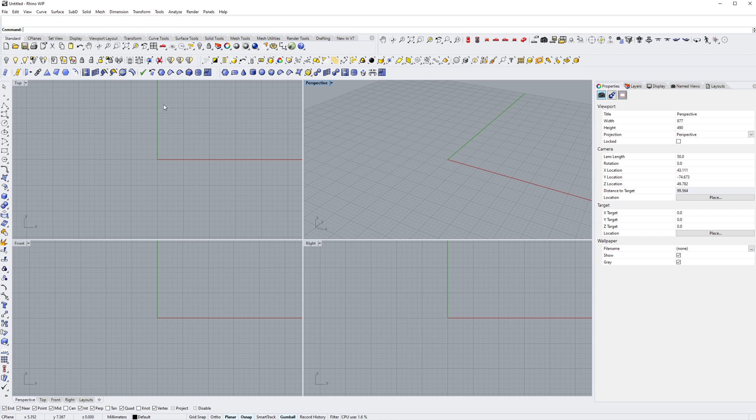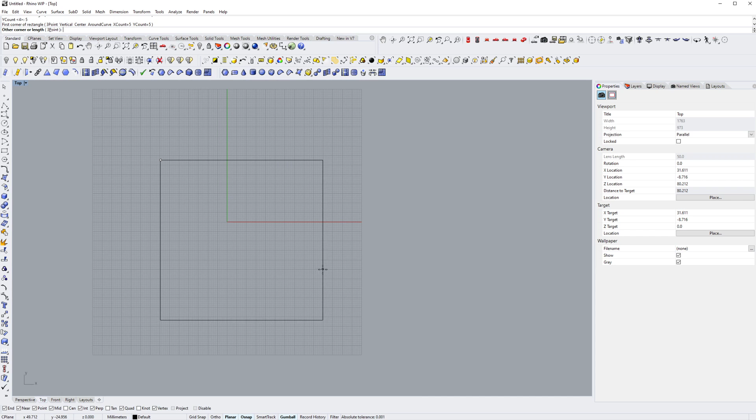So first we're gonna go to the top, and we're gonna go to SubD, and here we're gonna choose Create SubD Plane, and we're gonna keep, let's say, 5 X count and 5 Y count. Once we create this square, you will see that now we get a SubD plane, which has its own surfaces, its own vertices.

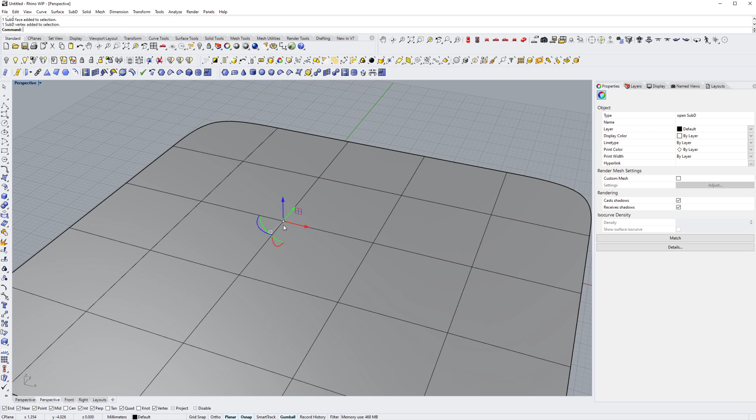The cool thing here is that you can select every single vertex. If you hold Control and Shift and click on the point, you can select a single point, and you can move this just like you see here.

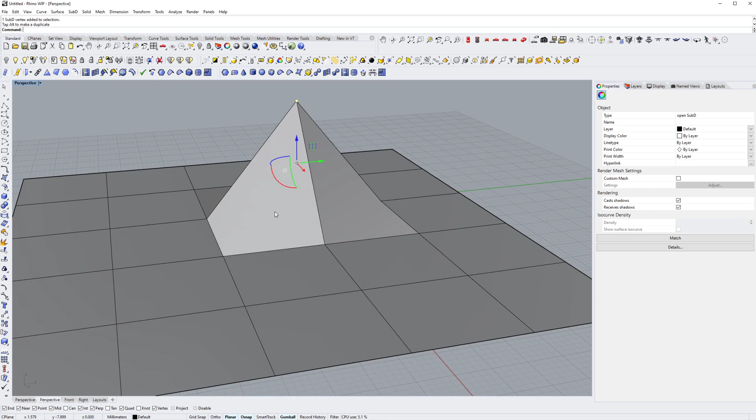And the cool thing about it is that when you press Tab, you have the so-called crunchy mode, which is just terminology McNeel uses, but we can call it low poly mode or whatever works for you. If you press Tab one more time, you get the smooth transition. If you remember, that's exactly how our geometry is supposed to look like.

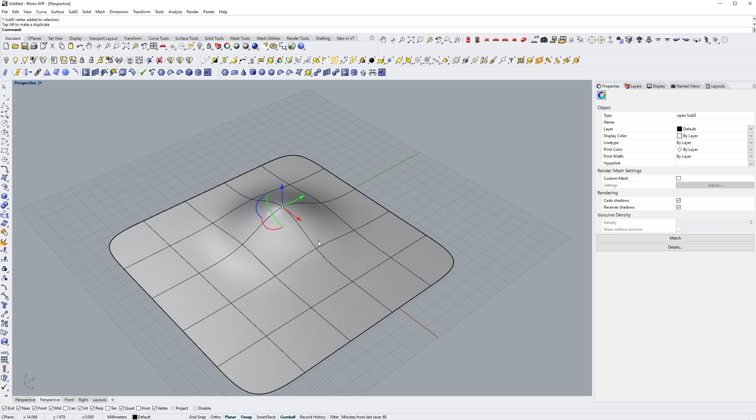Now I'm just gonna give you a couple more pointers on how you can manipulate SubD geometry. The cool thing is that you can select the whole edge. If you hold Control Shift and double click on one edge, you will be able to select one edge, and then you can bring the whole thing up just like this.

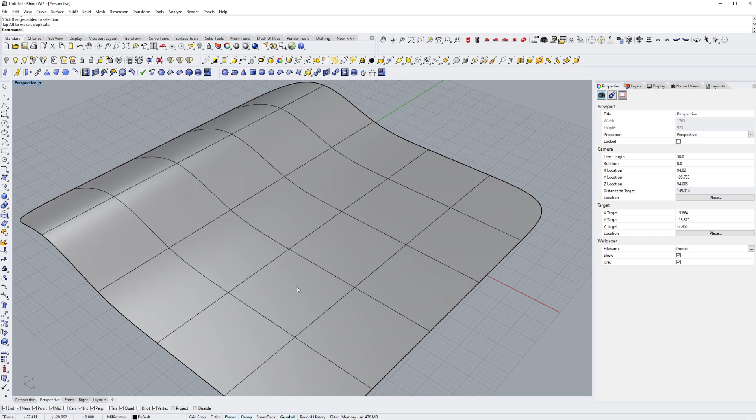On the other side, you can also do this with SubD surfaces. If you double click like this, for example from here to here and double click inside, it will select the whole row of SubD surfaces. That's very handy to know, because sometimes you want a specific selection.

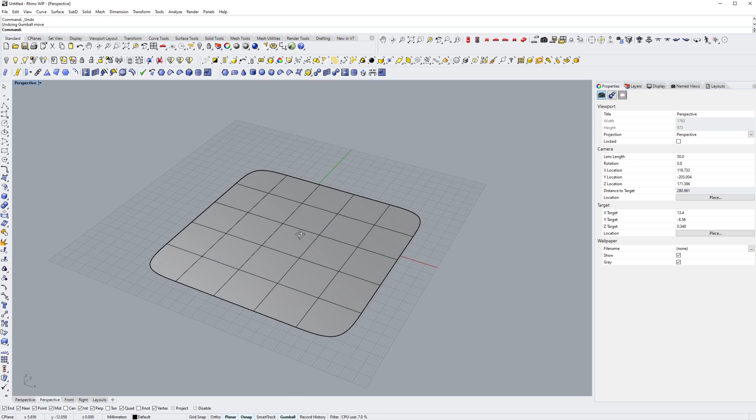In our case, we simply need to extrude this SubD plane here. So we can either do the extrusion that looks something like this, and then you can see how this looks in low poly mode.

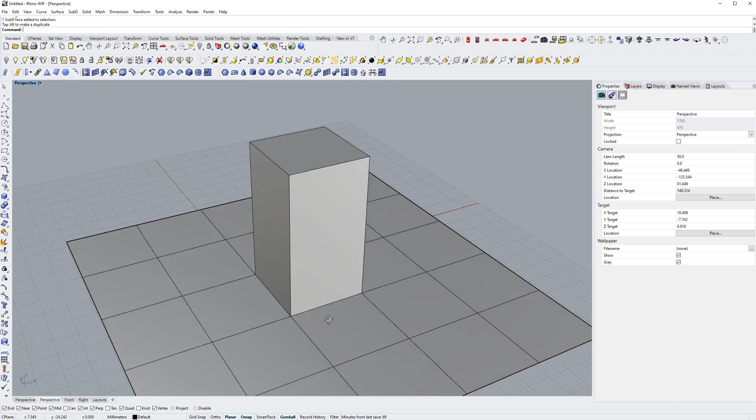If you want to have a better transition, what you can do is select these 4 vertices, and you can come here to the scaling tool, hold Shift and create something like this, and then maybe bring it up a little bit. This will give you an even nicer transition for the whole element.

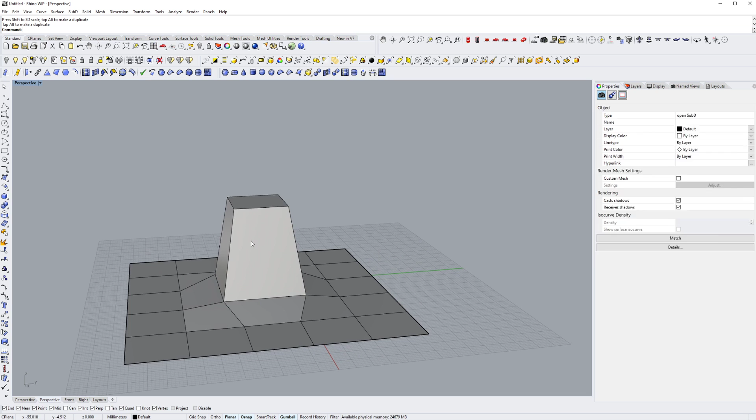And of course, if you want, you can do the same thing in this smooth mode, so you don't need to go all the time into low poly mode. You can also manipulate this on your own, scale it and do whatever, but we're gonna keep it symmetrical for now.

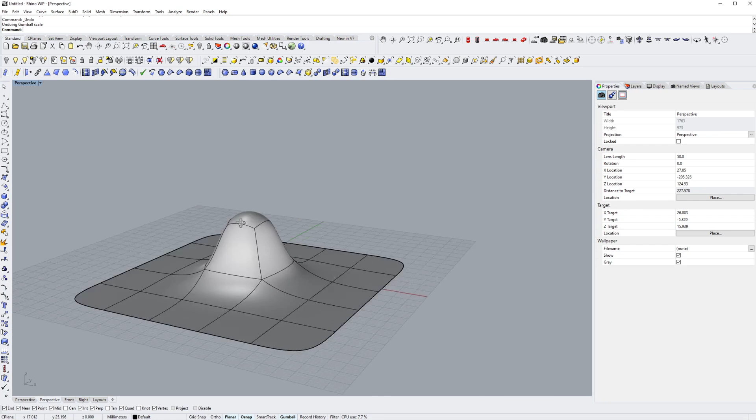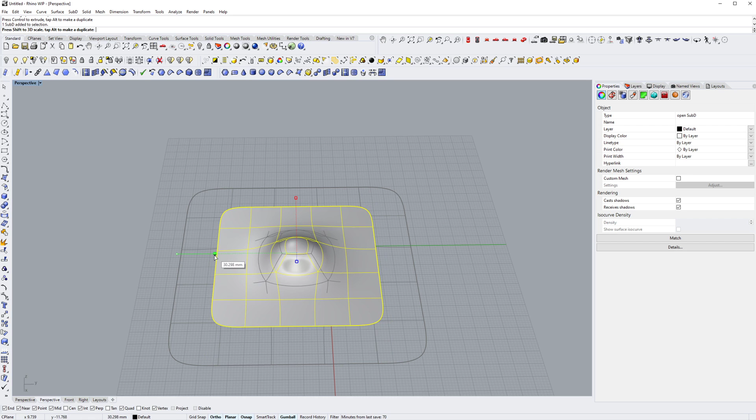So I'm gonna create something that seems more like, for example, let's say this guy here. Maybe I would scale it in a little bit, and maybe I can scale it also from here.

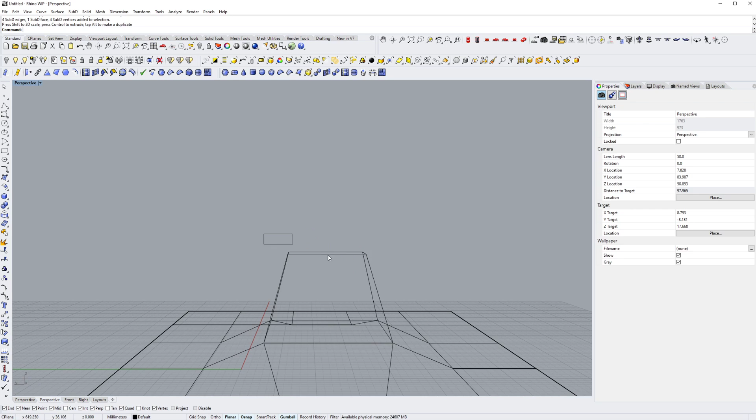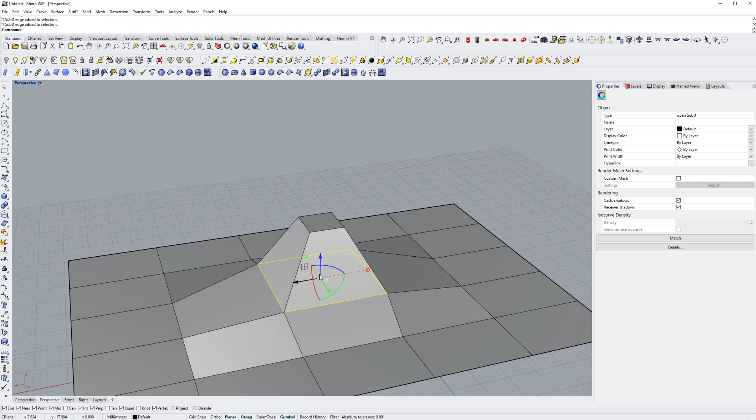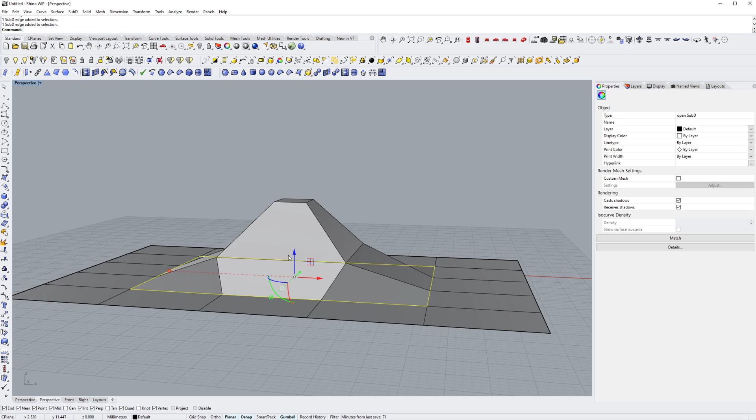We can scale these in as well, and maybe from this side, so we get a more sharp corner. Something like this. If you want this transition to go all around, you can select, for example, these edges here and scale them even more, bring them more up. This really seems like a good transition. One more time, we're going to do the same thing here, maybe with these guys as well. So once we have them, we can just bring them up a little bit, and now we'll have that transition just like in the example. So that's one thing. And now, what if we want to convert this shape?

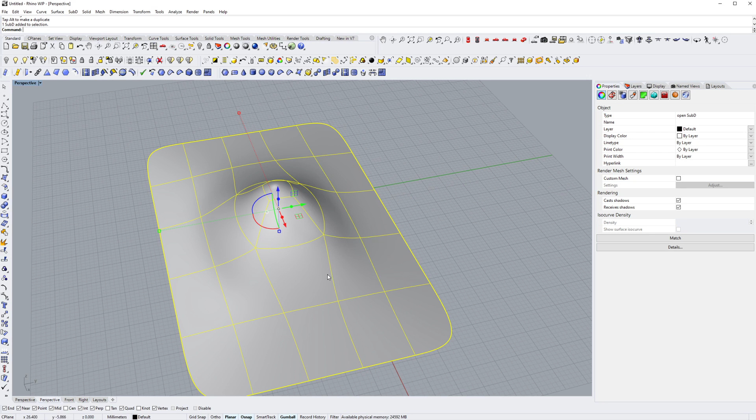What do we do? First thing you can do is convert the SubD object to a NURBS surface. To do that, you just need to type, let's first copy it over, then type ToNURBS, enter. Let's go again, delete object input, yes. And now you can see that we have a poly surface with multiple surfaces.

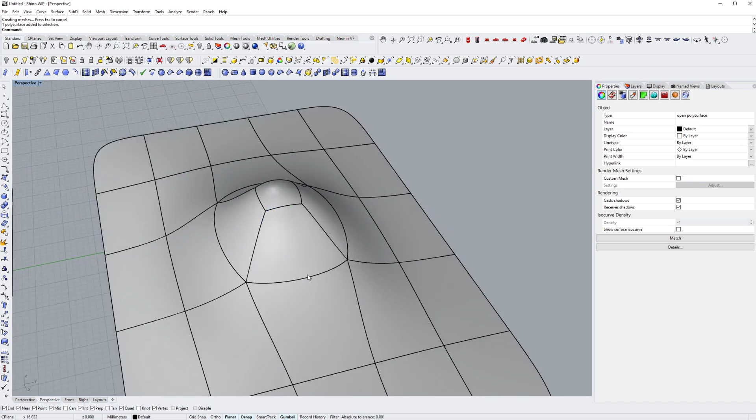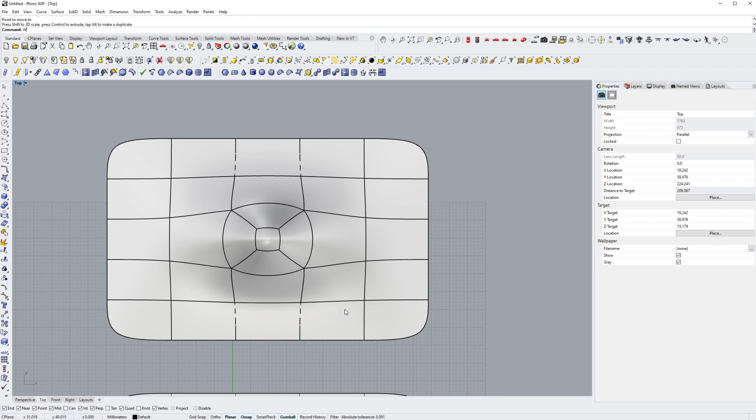However, if we want to have a clean surface in Grasshopper, we need to rebuild this. First I'm going to go to the top and create one rectangle here. Let's go from here first. Scale 1D, and now I'm going to scale it in like this, bring it in the middle. Okay, and I'm simply going to do trim, and we're going to get this.

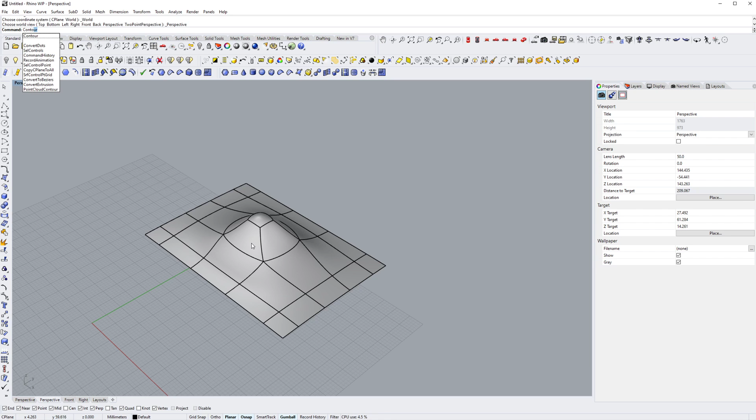And now we don't need this anymore. Now what we need to do is rebuild this surface. We can do this in multiple ways. Maybe the easiest one would be to create the contours. So let's do contour. This will be the object.

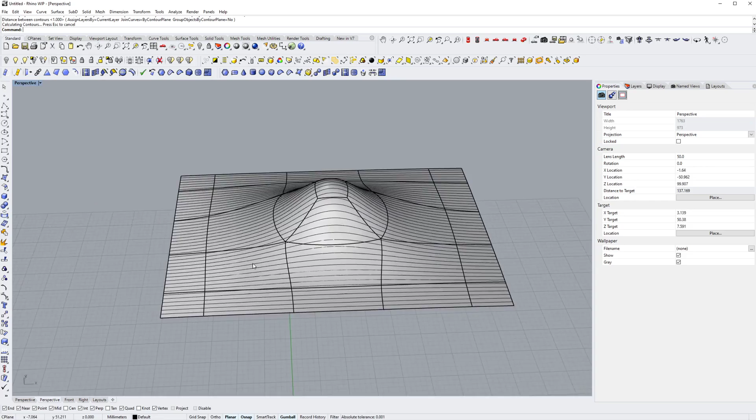Base point would be here, this would be the other one. Distance between contours, let's keep it 1. And I have these contours on this side. And you want to do the same thing on the other side, so I'm going to do the same command again. I'm going to keep this point and this point, and there you go.

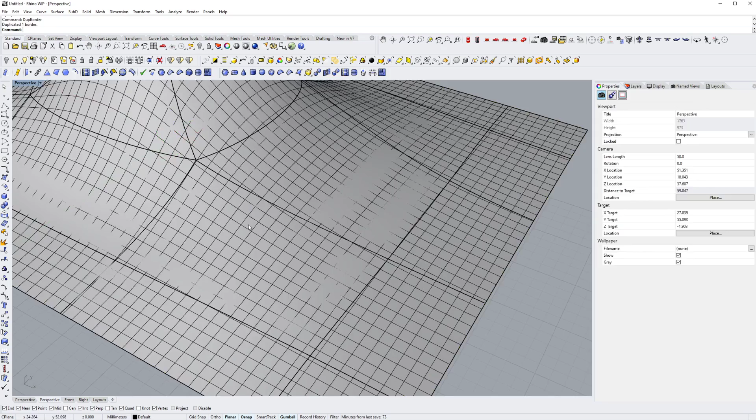Last thing that we want to do, you want to say duplicate border, and you can delete the SubD, and this is what you're left with. And now you just need to do a simple patch. You can keep the default, and now you would get the clean surface that we're going to continue to work on in Grasshopper. There it is.

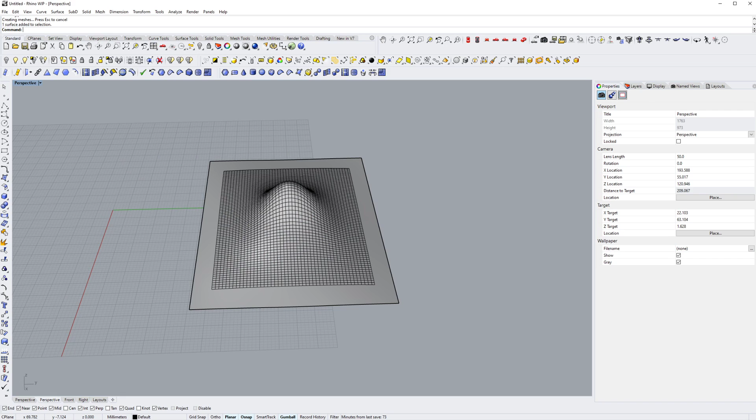Okay, so now, just a second. Okay, so now we're going to transition. Lazar's going to hop in and he's going to continue from here. Yeah.

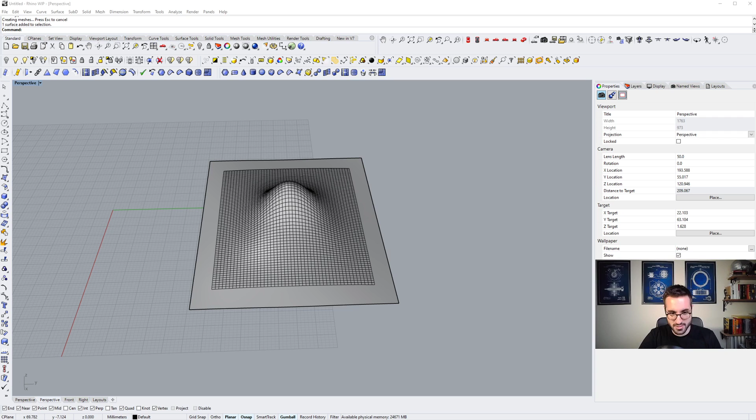All right, as we created a surface, now we can import it in Grasshopper. And I'm going to run Grasshopper.

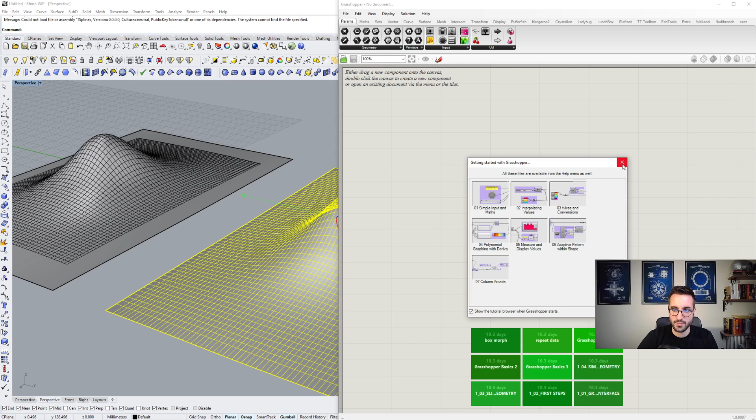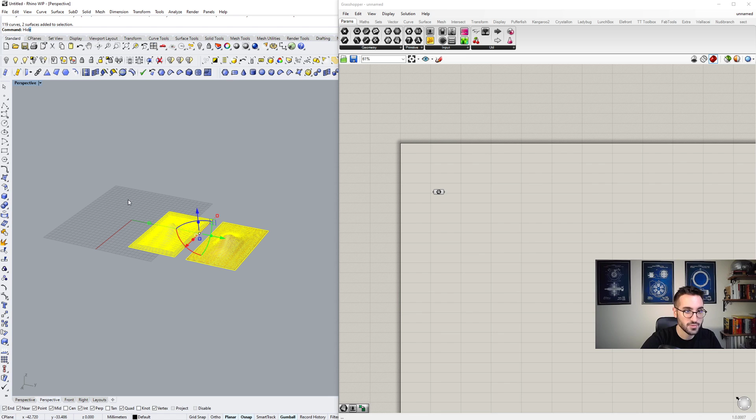All right, first we're going to use a surface container in order to reference the surface from Rhino into Grasshopper. I'm going to hide all of this. And as we can see in the Rhino viewport, we reference this surface inside Grasshopper, and now we are going to divide it in order to get the points.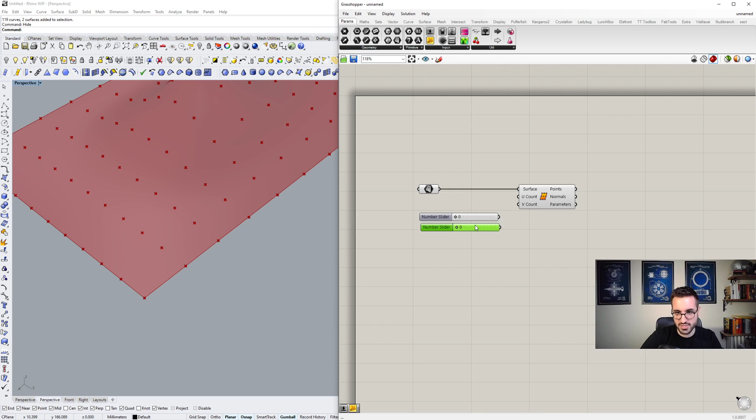All right, let's make a stronger density from 0 to 100, and I'm going to copy this slider because we need to divide the surface along the U and along the V direction. And we can see here the division points.

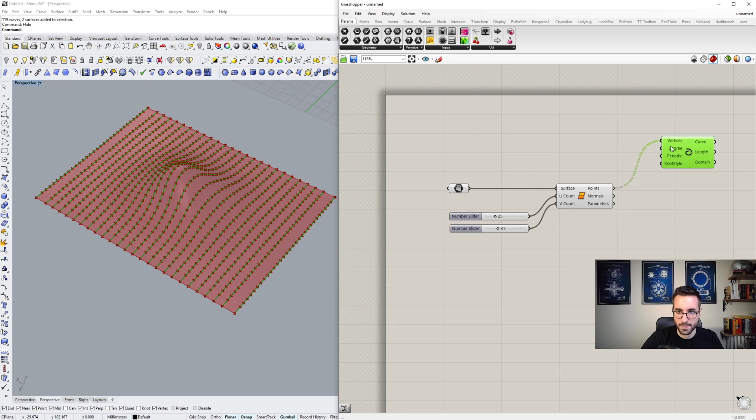Right now the next step is to connect these points and create lines along both directions, along U and along V. I'm going to import interpolate curve and connect points with the vertices. Let me turn this off, and this guy as well.

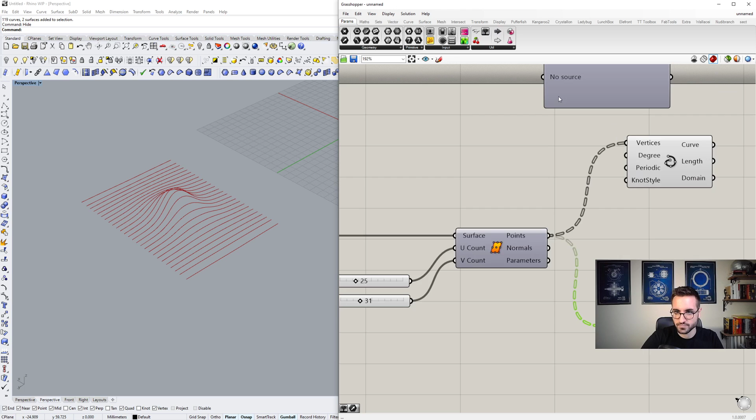And we created the curves along one direction, but we also need curves in another direction. All we need to do is flip the matrix. Let me show you here what we did. Using the param viewer, we can check the data tree inside the component. You can see there are 26 branches, and each branch contains 32 items. But once we flip the matrix, we have 32 branches and 26 items inside each branch.

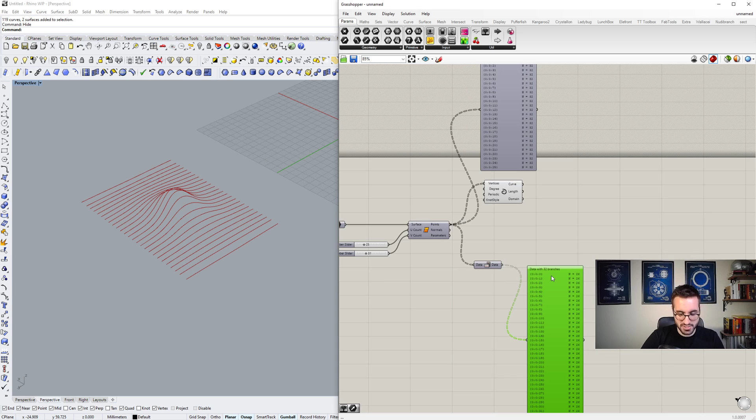I'm going to copy this guy and create the curves along another direction. All right, and the next thing...

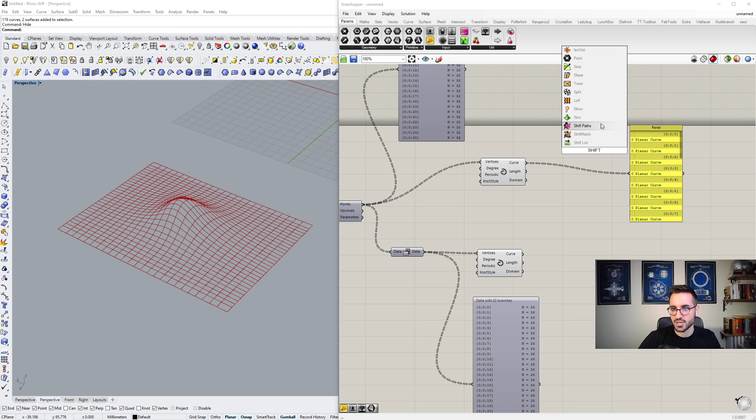I want to remove the first and the last items inside each list. We want to remove first and last, but first let me shift the paths in order to have, because right now the tree looks like 26 branches with one item inside each branch, but we want to have one branch with 26 items. We can do this by offset, and right now we have branch 0, semicolon 0, with 26 items. And we are going to do the same thing here.

Once we have all items inside one list, we can remove the first and last item using Cull Index. For the indices, since we want to remove first and last, we are going to use a Merge component.

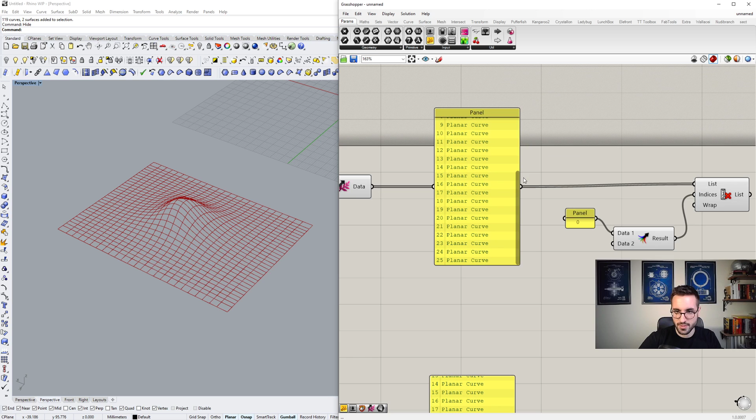Into input data 1, we are going to import 0. And for data 2, we are going to import 25 here, and here 31. You can use the sliders from here.

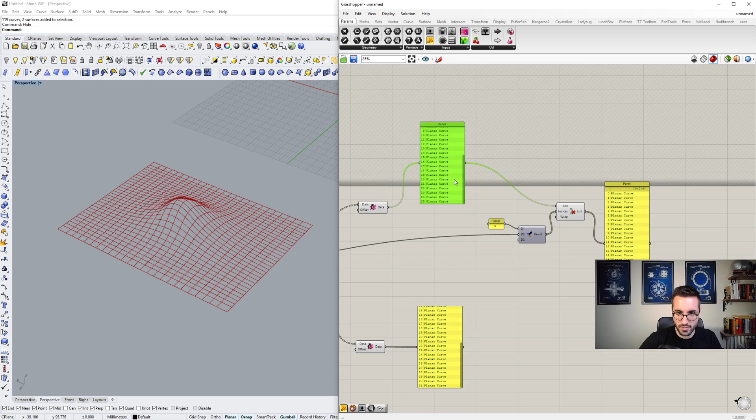Let me check here. Because I connect the text from the panel, the geometry is not visible in the Rhino viewport since text cannot be visible right now. So we need to connect the data from this component.

Right now we see that the highlighted components are only the middle ones, so it's not highlighted the first and the last one. And we are going to do the same thing for the curves in another direction.

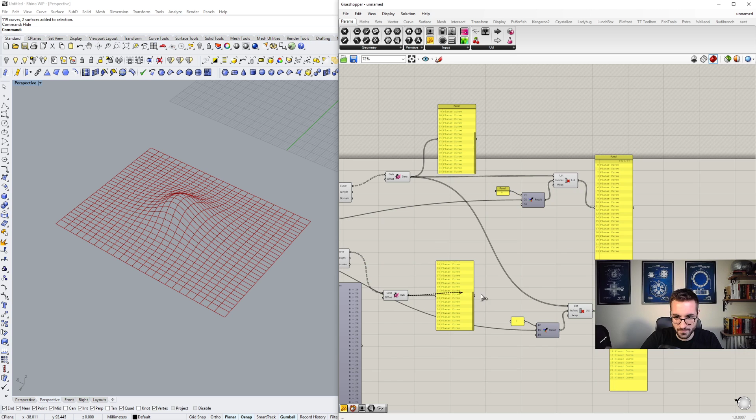But here for data 2, we will input 31. We should move the video on the left side - just give me a second, because the video is... okay, let's go now. Okay, now it's better.

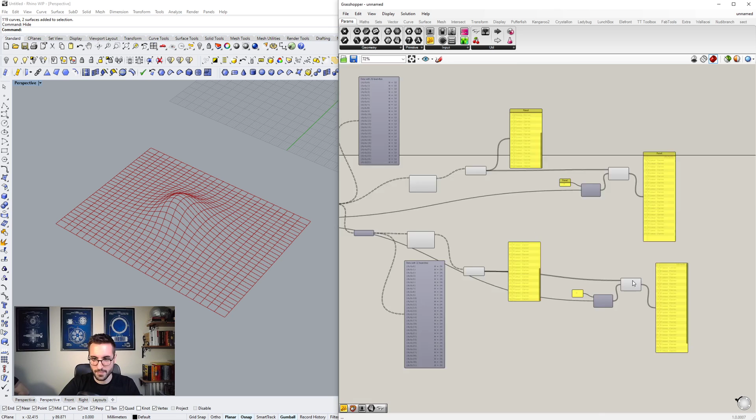And using Cull Index, we discard index 0 and index 31. I'm going to turn off this.

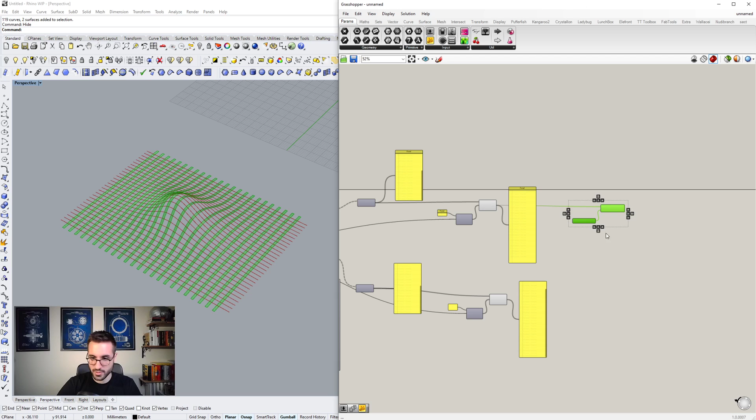And now we will extrude each of these. One we're going to extrude along the X direction, and another we will extrude along the Y direction using Vector Y.

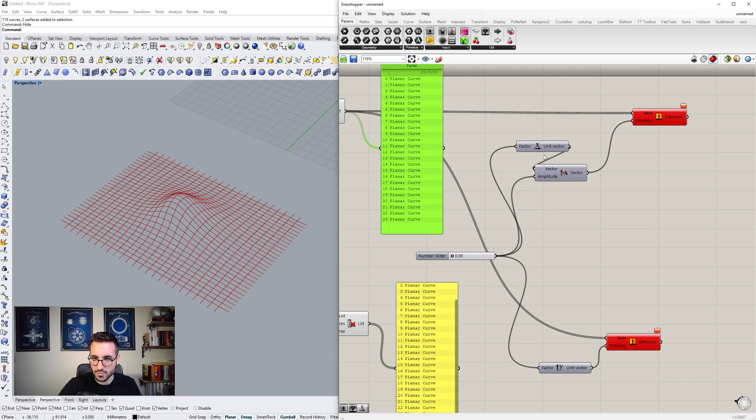And we will use the same amplitude for both of these lists - the amplitude and vector. Right.

You don't need this. All right. And the extrusion will be for another direction along Y. And we can see in the Rhino viewport that these lines became surfaces.

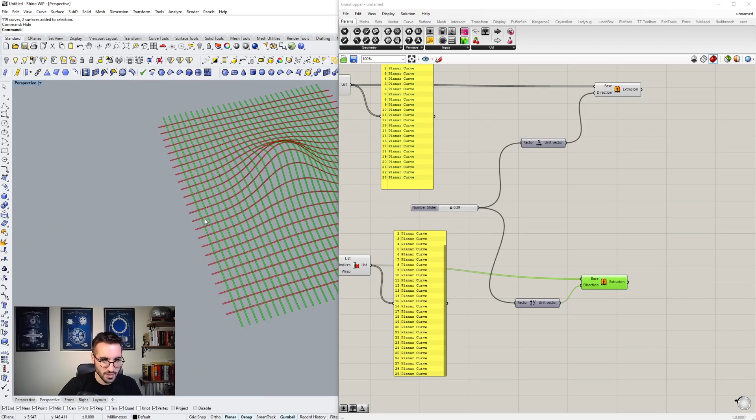And now we're going to extrude them along the Z direction. Again, we'll use Extrude and the same factor for the extrusion. All right.

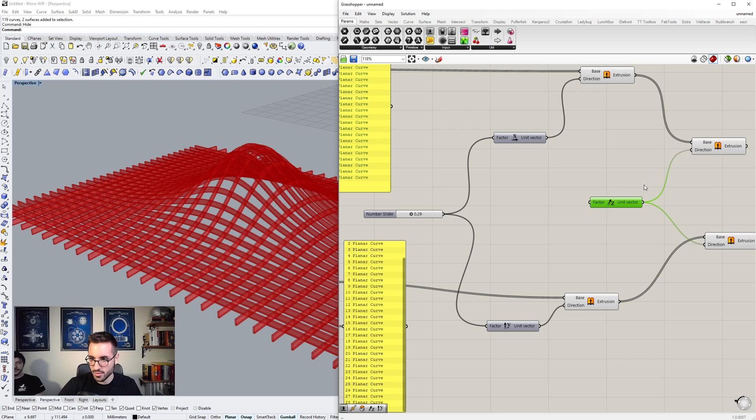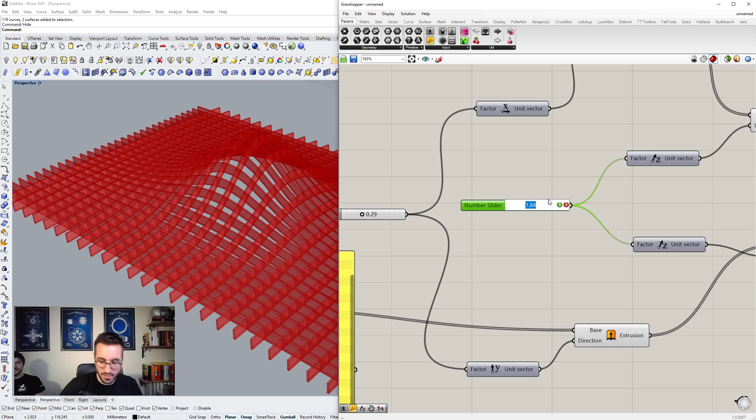Let me check how it's going to look. All right, awesome. Maybe this should be a little bit smaller - let's say 1.5. Cool, and it's quite similar.

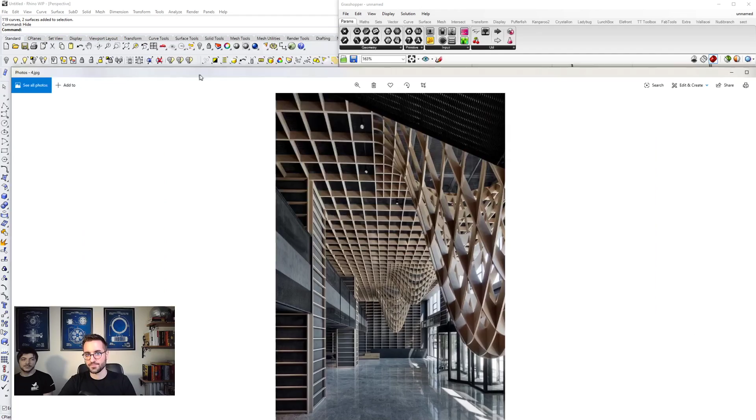Let me open the reference image. Yeah, I think we got a quite similar result. Just show them how to bake it, and then continue. The last thing we can do is bake this.

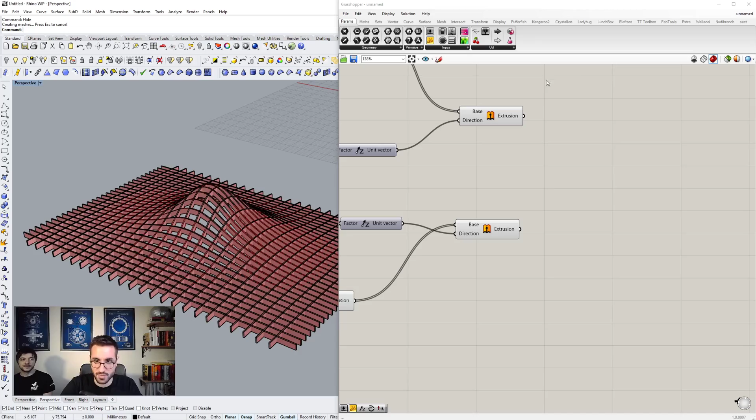We also considered creating these notches, but because this tutorial would last maybe longer, we decided to skip this for now. Cool.

Cool, and we create this waffle structure. All right, cool. All right, let's switch again. All right, let's continue.

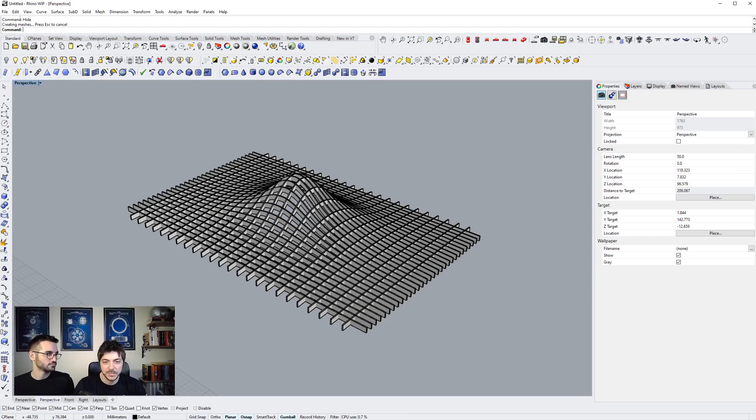So just a second. Okay, so you saw how we can easily, in just 20 minutes or less, create this kind of effect, which is similar to this geometry. It's all about combining the tools that you already have in Rhino and using them the right way, the proper way.

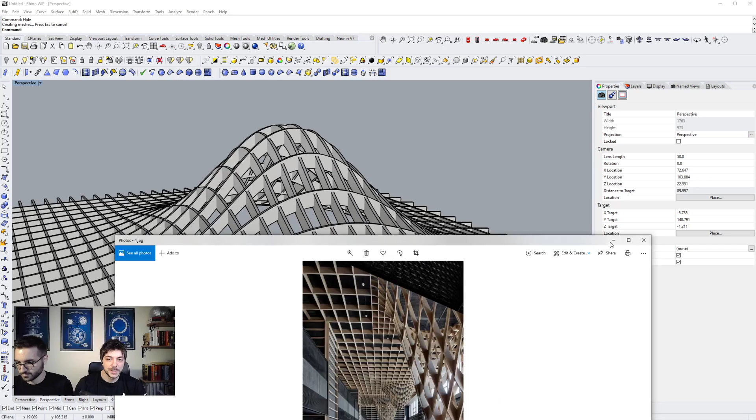If you want to go a step further, we would probably create places where they would intersect, and then you can send this to the laser cutter, and in like 30 minutes you're done. So this is really the true power of parametric modeling and also organic modeling with Rhino.